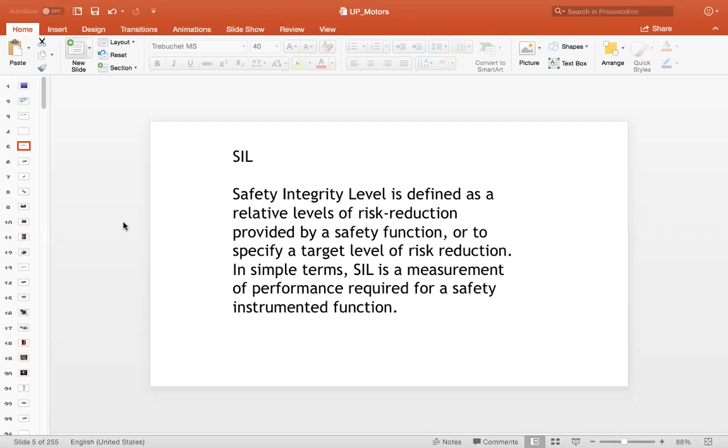And this type of system has been around for at least 100 years, probably more. We've certainly gotten more sophisticated than what we did 100 years ago, but when we learned about electricity, it wasn't long before we were looking for ways to make our lives easier and move stuff around, make stuff happen, whether it was industrial or commercial or in the entertainment business.

So whether you're flying a piece of scenery up into the fly loft, or dragging the bedroom scene out of stage right and on stage and then continue off stage left, it's probably going to have a system that will have these components in them. We'll go through the components first, and then we'll start breaking it down a little bit in terms of how to deal with them, how to use them, and how to maintain them.

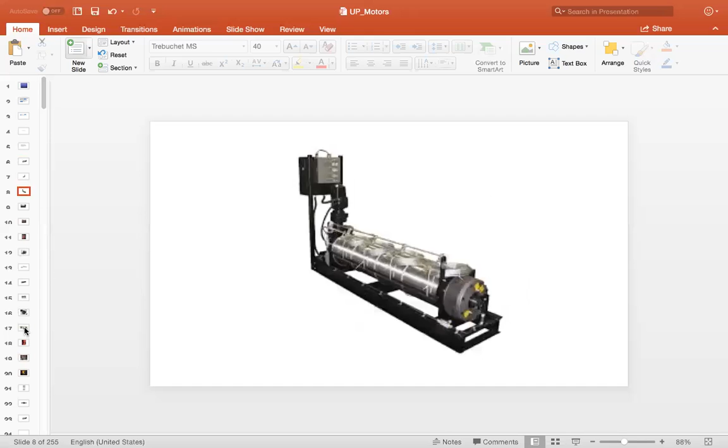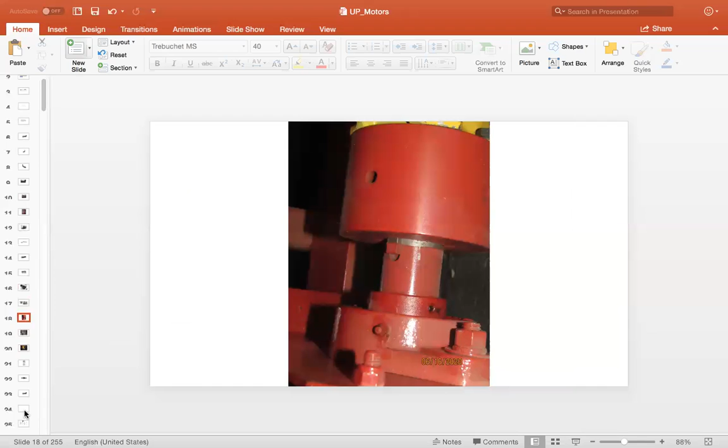I'm going to go find it... where did it go? This is what I hate about this, because I can't see. All right, folks, that's not it. And neither is that. Who wants to... all right. We're back here. I'll find it in a minute. I'm going to have to quit out of full screen and go back to find that photograph, because it's just not coming up, and I apologize.

Michael Borlas has asked, did I pronounce that right, Michael? I think I asked you that last time. I'm not sure. It's close. I would call it Borlace, like shoelace. Okay, Borlace. Okay, great. Thank you.

Is there a safety stop function so that if a winch's load gets caught into something, it will stop? No, there is not. This is a very basic motorized system. We were going to get to the safety aspects of it in a minute, but to address your question now, there is no load sensor, which is usually what is installed on a winch system to catch that sort of thing. If you're raising a pipe and it gets caught on something, you wanted the winch to stop before it damages or breaks something, or causes a problem. Most unsophisticated, but most simple winches like the one you're looking at will not have that kind of a sensor on it.

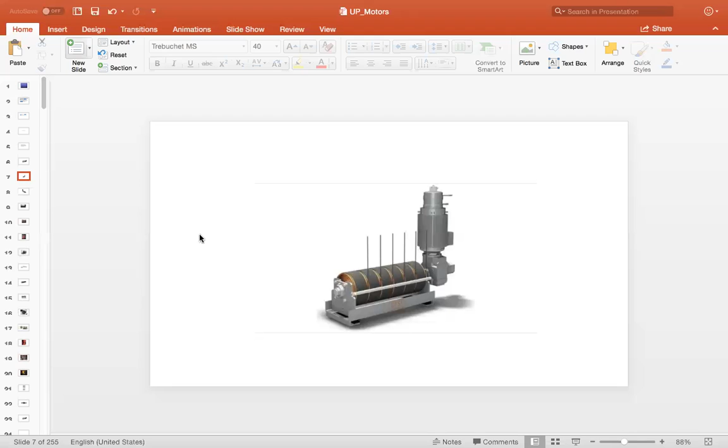In this winch, they've put the brake on the outboard end of the shaft, which is a little bit better because now you're protecting all along this line. Something could potentially break in here and allow the drum to freewheel. The shaft coupling could go, or something on the brake on this side. Who knows? So they put a brake on the outboard, and this is an overspeed brake. So when that drum starts turning too quickly, the brake will engage.

The amount of times that has happened, at least in my experience, not only personally but also in the research I've done, you can count it on one hand. Where these systems fail is not in what you're looking at, it's what's connected to the scenery piece, or the scenery piece itself. The chances of getting a catastrophic failure in a winch system like this are extremely remote. But the double brake system situation has caught on, and I choose my battles. I certainly am not going to fight that.

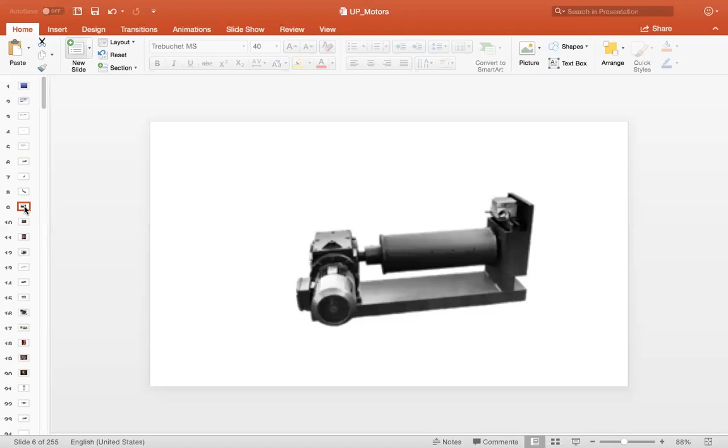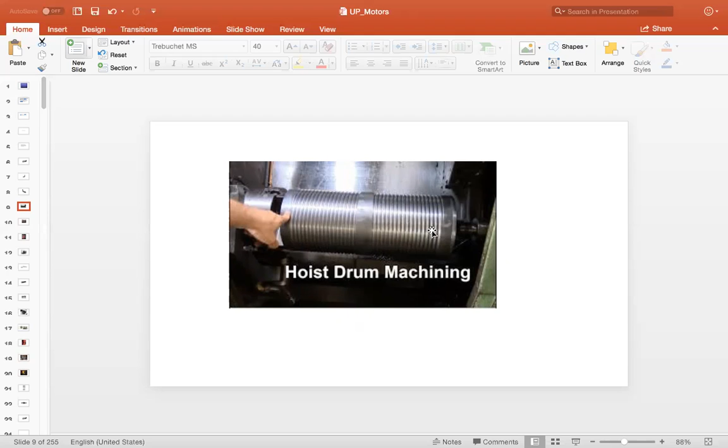Okay, moving on. I just wanted to show you a picture of a helically grooved drum. This is one groove. It starts here and ends over here, and then it does the same over here, although this one is reversed. So on this particular drum, the cable takes up on this side when you're lifting, and on this side is what it appears to me -- or it might be, I know you call them yo-yo drums, but I have a different definition for a yo-yo -- where this side is taking up and this side is letting out at the same time. You would do that on a piece of scenery on the deck. You want to control it both to pull it on stage and to pull it off stage with one winch. So one line goes to the off stage side, one line goes to the on stage side. As one side is pulling it on stage, the other line is coming off the drum, and vice versa. Just wanted you to see that.

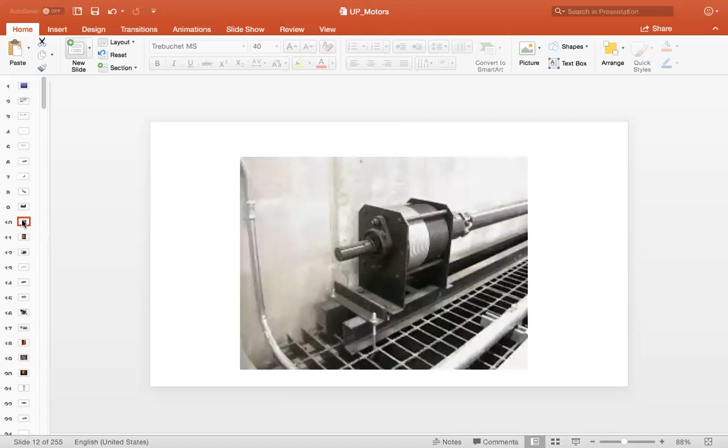Line shafts. Boy, I am... okay, now we're going to go and start it all over again, because I am going to find that photo. Just bear with me here while I open up the program again.

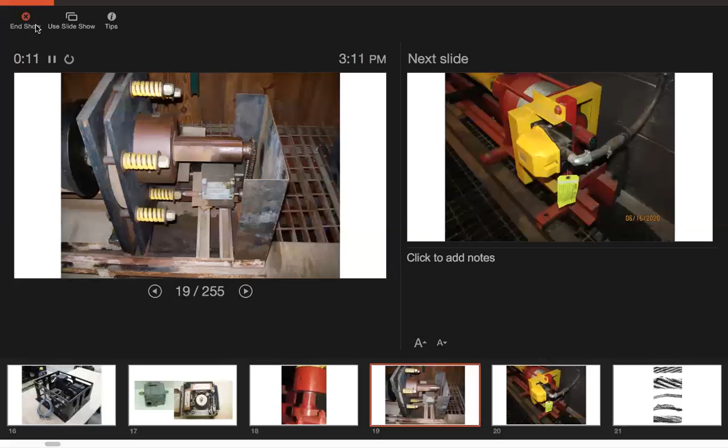There's an ugly winch. This is a drive-through brake. It's an overspeed brake on the outboard side of the winch. The motor is on the other end, and I know where this winch is -- I think it still lives there. This is a very old photo, so it can't possibly look any better. But that drum is probably about 7 feet long, maybe 7 or 8 feet.

So we have an overspeed brake here, where when you're lowering the piece empty, you get all of that awful noise. It's only when you have more tension on the line that you lose that noise. But this gives you another idea -- a good, if not dirty, image of the limit switch and the limit switch chain here.

And the other thing I want to point out about a limit switch is its vulnerability. Remember that these systems are not complicated at all. The only communication that this winch has for turning off and turning on, other than your finger, is the limit switch inside.

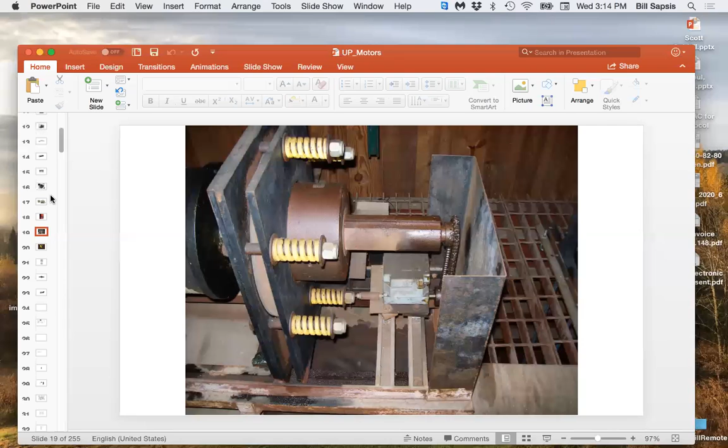So when you're doing inspection and maintenance, the limit switch is an extremely important component of that. Okay, so let's wander back.

And you can drive as many drums as is appropriate for your application, making sure you have a gearbox and motor strong enough, up to the task of driving 4, 5, 6, 7, 8 drums. So instead of one drum being driven by a motor, you have multiple drums.

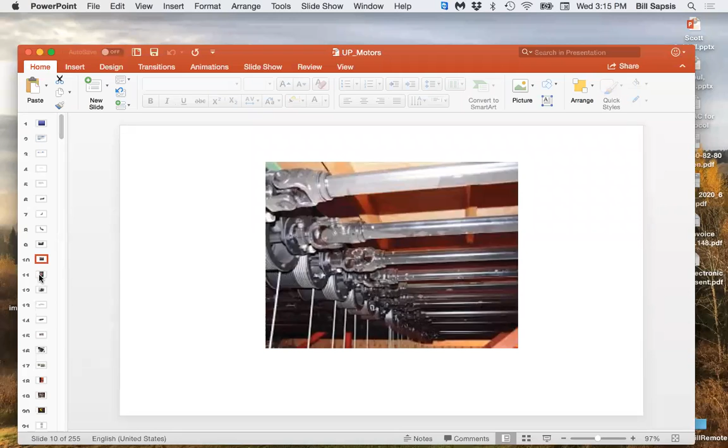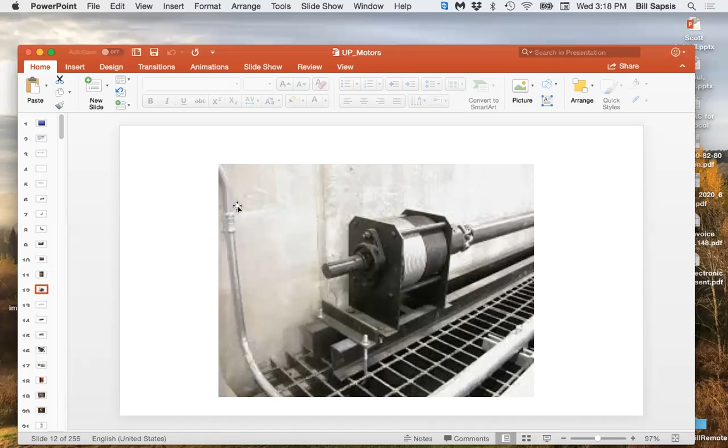Well, that is a concern, and clearly whoever is designing the system needs to take that into consideration. I have seen line shaft systems that are relatively long, with 6, 7, or 8 drums on them, and instead of having one winch in the center, they will have a winch over on one side and another winch on the other side. So they're shortening the torque they need because they're shortening the shaft. It would be more challenging for this winch in the picture to turn a shaft that was 40 feet long, for example - you're going to get a lot of torque, a lot of twist in that shaft. So one common response is to add more winches, more motor and gearbox assemblies on the line shaft. It creates other problems, but that's another story.

Norm says, my fire curtain only had one way to control it, a knife to cut the rope. Did they still have the knife, or did somebody steal it early on?

Camille is correct - the ANSI standard does not permit it. E1.22 does not permit 'in case of fire, cut this rope.' It's not allowed anymore.

Yeah, they took the knife off. That's before somebody took the knife and went and robbed a bank or something, right?

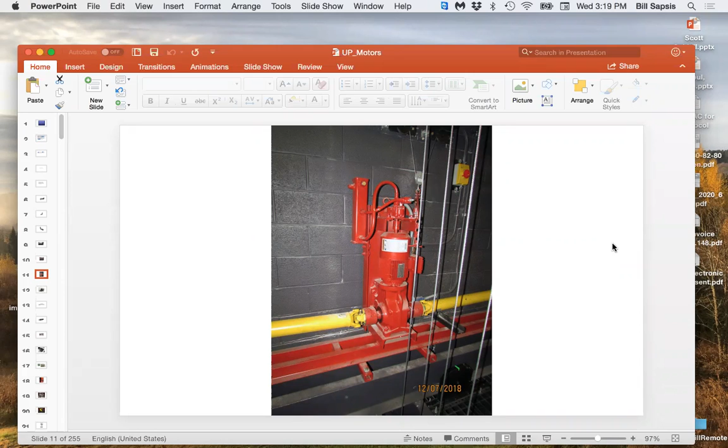Okay, so this just - let's see, oh geez, it's really that late already? How did that happen? I'm sorry.

Package hoist. We talked about PowerLifts and Vortek, and there's a Prodigy, and there's another one. They are all variations on a theme. I'm going to use this one as the model because it's got potentially the easiest visual to work with.

It's a system for doing multiple lines in a relatively easy manner. It's called a package hoist because they build them on an assembly line, put them in a box, and you can just take them out and plunk them into place, and you don't have to do much of anything else to it. Would that it was ever that simple.

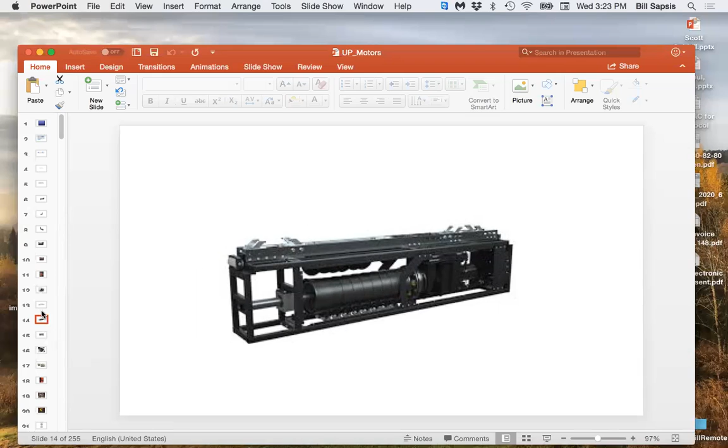I'm not quite sure, I think it's ETC. I think that's an ETC P75, right? Say it again. ETC P75. Okay. And this is the power lift from Clancy.

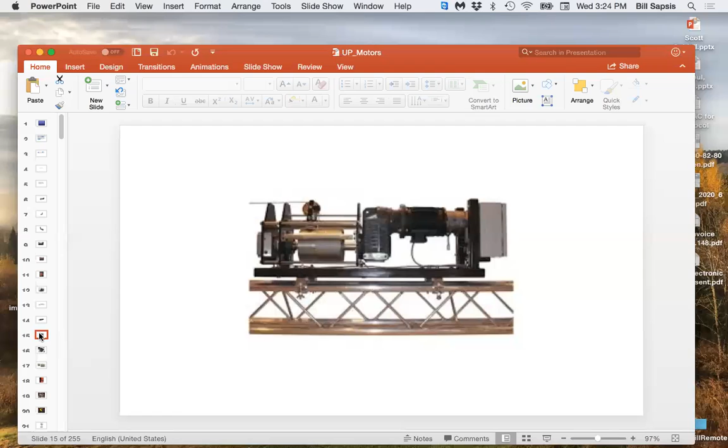Is this one maybe a DeSisto? I don't know, are they still in business? I'm not sure, I haven't seen one in a long time, and I'm going to keep my snarky comment to myself. Sorry, I know I'm going to get a call on that one. Actually, nah, I don't think so, for a host of reasons that I can't go into.

Here's a Performer flying winch. You got the same stuff: motor and a brake and a gearbox and a drum, different looking drum, and the sprocket, limit switch chain, limit switch assembly. What's different for this system from the ones we just looked at is mostly on the control side.

On the control side, there will be sensors - I can't see them in this photo, but there are slack line detectors. There is an overload protector, as we talked about briefly earlier. When it senses too much force needed, it shuts down. A slack line detector is usually a trip switch of some sort, like an eyelash switch, where if the cable hits it, it shuts the system down because the cable shouldn't be there. There will also be a potentiometer probably in with the limit switch housing, which identifies position for the system.

But at the end of the day, it starts out with the same basic stuff. You got a shaft running through here and a shaft coming out here. Motor, gearbox, drum.

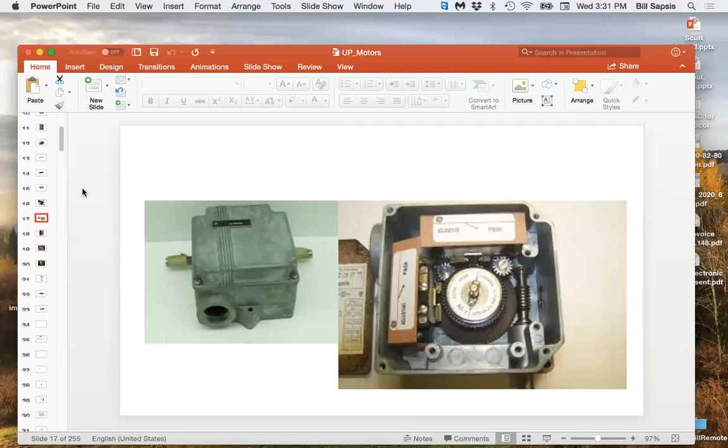That's a Creative Conners. Jack Miller asked, am I sure it's a Performer winch? As far as I know, but that's a Creative Conners system. Is it not a Performer winch, Jack? I mean, it could be, but typically they don't do performer flying. So Creative Conners? Yeah. They don't. Gareth doesn't like the liability, which is understandable. Yeah, but he likes to sell you stuff. Oh, yeah.

Brian, your slackline sensors are at the head block, so they're not on the winch at all. I'm assuming the head block is a separate item. Yeah, this is for, I don't want to say too much name-wise, but it's a very famous flying effect in Anaheim, California, at a gigantic theme park. Well, gee, that narrows it down. Right. The winches are on the 5th floor of the structure. The head block and the diverter block are up about 50 feet above it on the 7th floor of the structure. So the slackline arms are right there where the operator sits with the performer and with the assistant operator.

So if something does happen, that part of it's a design thing that Scott Fisher came up with, to put them there, so we don't have to run up and down stairs any more than we already do. Yeah. You've got all your telemetry on the screen in front of you. The GUI will tell you, hey, slackline sensor went, but you can also turn to your right and see, oh yeah, I do have a slackline. Right. All right, great. Relying on a screen and not having visuals, it's always better when you have both.

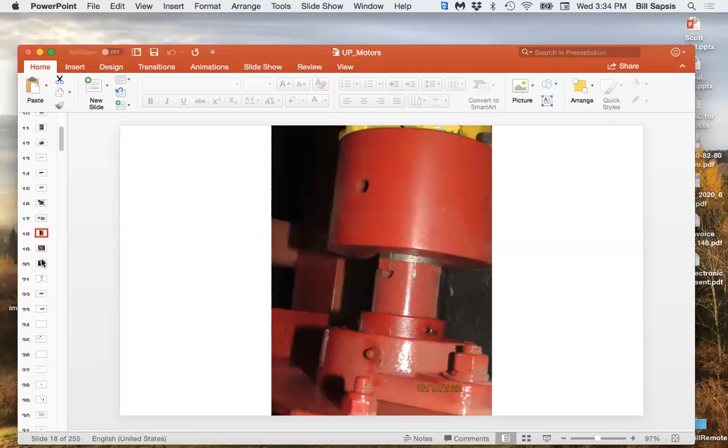Always better. And speaking of things going wrong, things to look for, I believe this is the same fire curtain winch that I showed you a picture of earlier. When I'm doing an inspection, this tells me, hey, we got a problem here, because that means that the shaft or the coupling, now you show up when I don't want you. Something has shifted here, because they painted this in a factory and now I got raw material here. It's one of the things that you do not overlook when you're doing an inspection. And I have no idea why I put this picture in here. I looked at this earlier today, so I don't know.

I know we're running late, and those of you who have to go, please do so. But I want to point out this wire rope issue before we get out of here today. With the winches that we've been talking about, with the exception of the performer flying, the basic winches run on AC current. When you tell it to run, it wants to run instantly at full speed, and when you tell it to stop, it does instantly. There's no conditioning of the electricity going in, so there's no conditioning of the start or the stop. You get a shock load every time you turn the winch on or off.

This can result in significant damage to the wire rope, because that shock load is traveling right through the system. And if you've got a really heavy load on an electric winch that you use a lot, there's a lot of stopping and starting. You're going to see shock loads, and they're going to manifest themselves with cable damage that looks like this.

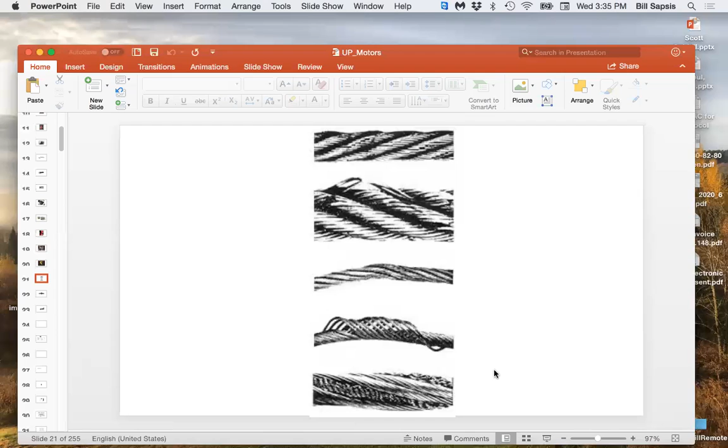What is happening is the wire rope is compressing, except for this one. This is a kink thing; that's another issue. But this one in particular, my favorite, we'll go right to this one. What is happening here is the bouncing that you get when you push a button. And the easiest way for most of us to understand this is what happens when you do it with a chain hoist and a truss.

You push the button to tell the hoist to take off and take the truss up in the air. It wants to run 16 feet per minute instantly, but it's got 2,000 pounds worth of lighting equipment hanging underneath it, so it can't. So it gets a lurch, and we've all seen that truss bounce, and that bounce transmits back into the system. When it's a drum winch, it's going through, in this case, wire rope, and it creates damage.

It's aesthetically pleasing, I suspect, to look at, but it's extremely dangerous. What has happened here is this wire rope has been subjected to tension and a release of tension very quickly. It's been bouncing, just like the truss does. The batten on the electric bounces, or in the case of a number of theaters that I've had to shut down their Eisenhower ceiling systems over the auditorium, the whole ceiling bounces. And you get these bird cage things, and it's extremely dangerous.

And the reason it's dangerous is this bundle right here is the center core. You've been pulling on the wire rope and releasing, pulling on the wire rope, and that center core, because it is the center core and runs straight through the wire rope assembly, is shorter than the other wires wrapped around it. So it takes the load and releases the load a split second before its six brothers and sisters. It doesn't like that.